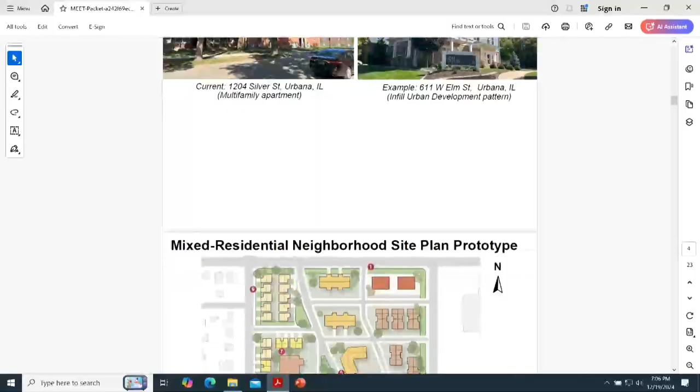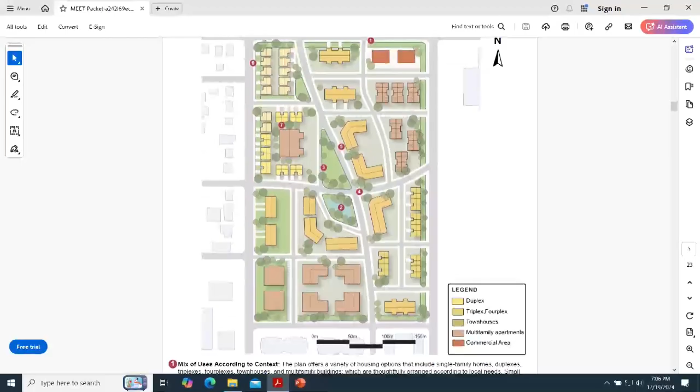And then they made final versions of these prototype plan views they had put together for a few of these different place types, based on some feedback we had given them. So I'd be happy to discuss any of these as we go through.

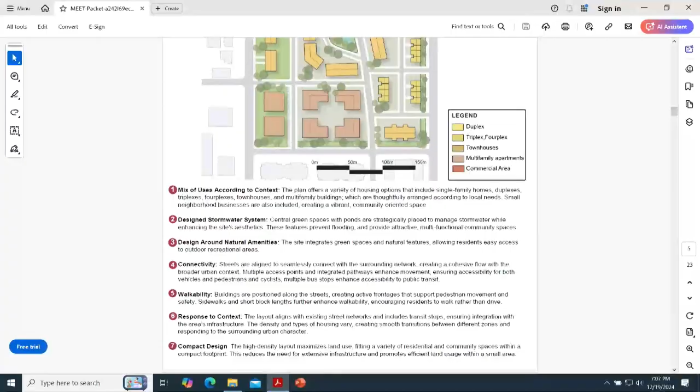We can do it, if you have specific comments about specific ones or things you want to talk about. I think as we go would be better.

I can start. I think we meant to do this, and it looks like it didn't get done, so at this point it will be on you to do. I've got the Illustrator files, so okay, I'm good to go. Well, this is not on that.

On the images for the different development types, I think we talked about how some of them are labeled, like on the mixed residential it says townhouses suburban pattern. I think that's good. I think some of these maybe need something a little bit more descriptive. So in some of these it's describing a development type, in others it's describing a type of change that's occurred. So I think we should be consistent across these. Townhouses suburban pattern is good.

Maybe as well as describing that it was this urban infill development, and then just something that's kind of consistent across the different development types. Like when you get to mixed use, there's the one that shows the hierarchy, that could be an example of business development in the mixed use, secondary core or something like that, because it just says secondary core.

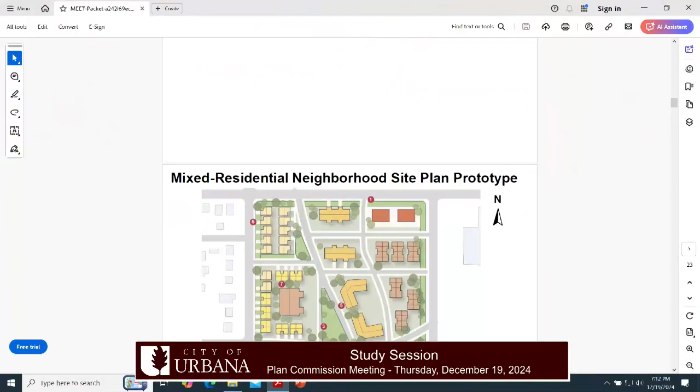Well, I think that's this, yeah, that's kind of this right here. Well, maybe these photos belong in your matrix or something if they're really the development types. The first four photos are development types, not place types. The site plan and the oblique are place type descriptions. Correct, yeah.

And that also means we need the rest of the development types in development types, as it's your matrix. If we're gonna do photos, we have to somehow coordinate the photos with that. Well, I'll let this go and then come back to other questions later. Mr. Rose, you had something?

Well, I concur with what I take as the gist here, namely that place types need a first presentation, and so the plan and the oblique would show the place, and it would be followed by development types. And it strikes me that these 4 photos of development types would benefit from having expanded captions to say the type of unit we're talking about.

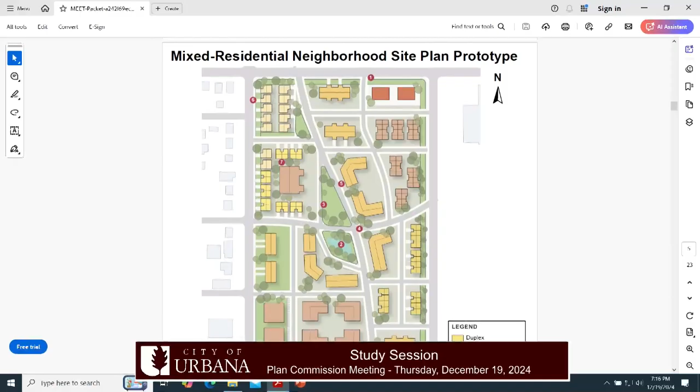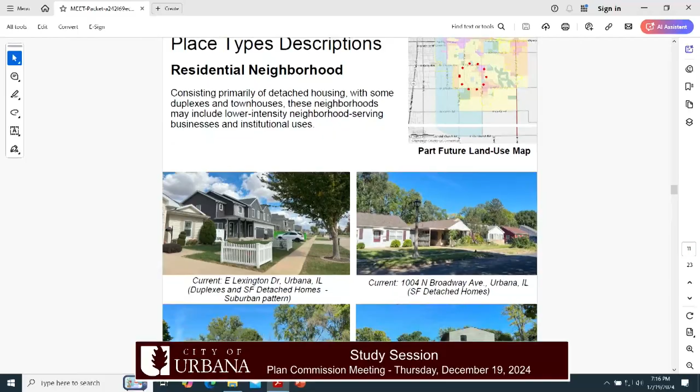I think the residential one is even more important to me because it's more about the different types of detached housing. So we wanted to show, not just what housing looks like in our older historic neighborhoods, but what housing looks like in other neighborhoods that have maybe different types of detached housing.

So I think it's useful to have that, and I think it would not be as clear to have something separate that you have to go back and forth with. A matrix could be part of this section, just a table someone could glance at, but I think it's useful to have this in each of the place types.

Mixed residential - we have a residential too, right, or do we? We don't have a residential at all? In what, mixed use? We do, it's toward the end of the packet. They're out of order. Well, I tricked you by putting them in a different order than last time I printed, to force us to actually read it.

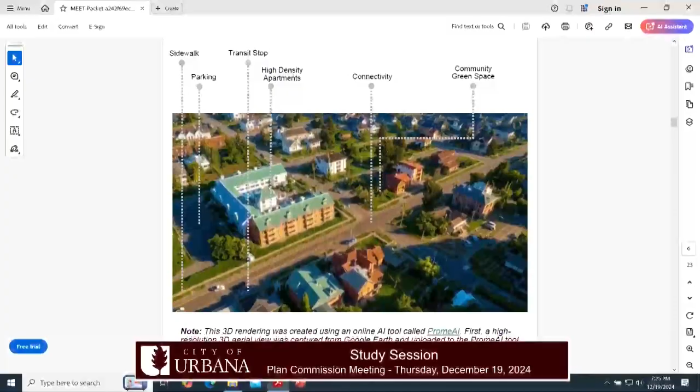Yeah, and I agree with you about focusing on Urbana as much as we can. And while we were talking a couple minutes ago, I was thinking the way I would like to do this is pull good images from Urbana where we can. And if there's something we just don't have a good local example of, then the fallback is to find a good example from somewhere else.

And I might add, if we are open to adding photographs, the photographs being of Urbana offer a link that I think is very valuable. But if we're talking about mixed use and connection, then a photograph of adjacent buildings seems to contain more than twice the information that a photo of a single building contains.

Yeah, well, we don't have an oblique for the mixed use. I think that would solve part of this problem. I mean, there are examples of a vertical mixing of uses, like Gregory Place, that we could include, in addition to downtown. But the thing that the site plan shows, and that we're trying to communicate, but don't have really good examples of, is more of a horizontal mixing of uses—a finer grain mixing of uses across a larger area.

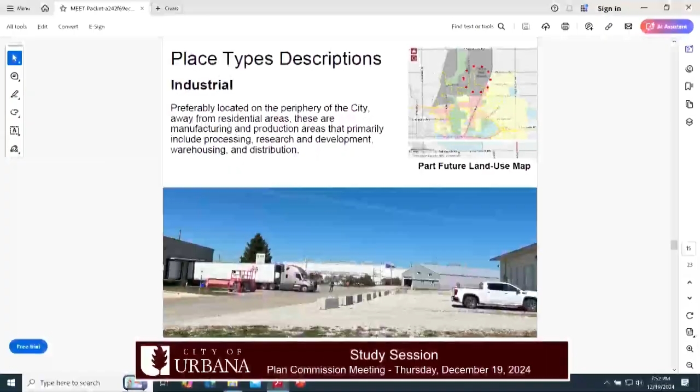The other thing is I think we ought to be intentional about industrial. We want industrial in a particular area because we want to take advantage of rail access, and we don't want people building houses there, taking away the opportunity to have a different kind of facility that actually might pay taxes, at least to the city, if not the school district, and be a good revenue-to-cost generator for the city.

I don't know that we need to keep the industrial zone along the south side of University, but we should be protecting the industrial on the north side of University intentionally, which I assume we are.

And the reason to be very explicit about rail is because we are going to give up rail in a particular area, and we ought to be protecting rail in the other area, and we ought to say that explicitly in what we're up to.

I thought we had talked about making a distinction between certain types of industrial - not just heavy industrial, but industrial that is a disamenity, or things that we don't want other things next to, versus less intense types of things that some might call industrial that are actually a good fit.

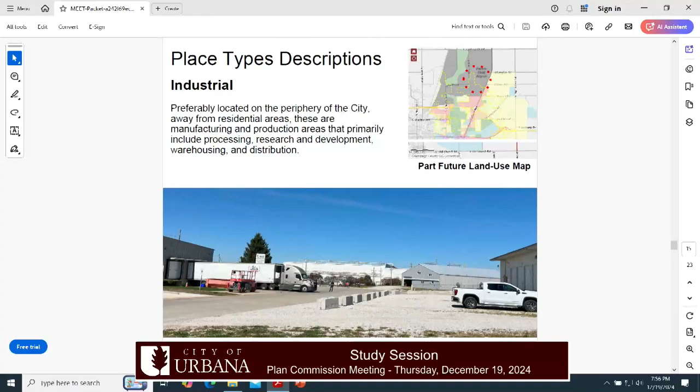Definitions - the problem is commercial means three things. To an architect, it means a building standard. To a citizen, it means a place where I go shopping. To a zoning ordinance, it means a whole set of other things, and we want to change what we think that is a little bit for some commercial zones. So we've got to allow for all this in our discussion, our description of what commercial is. I struggle with coming up with a better word though, because it is all about commerce, right?

We've got to say that in the plan, in the descriptions, including our development types and so on, we're going to use that word. We just have to elaborate in the various instances what it means. I think it's fine. Like if you look at the mixed use description, it doesn't talk about commercial, it describes things like businesses, offices, whatever. So if we want to add more nuanced descriptions, we can do that without defaulting to commercial. And within the commercial place type, we can make that list more expansive to capture some of these light industrial type activities that we think would be appropriate in those areas.

One of the terms we used before, when you talked about the derivative of commercial being commerce, we talked about commerce centers at one point, and I don't know if that's a better activity descriptor. Activity centers, we said, didn't we? Yeah, we did, and that's on the development opportunities map, as we have some of these areas called out as activity centers. Anyway, I think that's the only other comment I had on the place types or the development types.

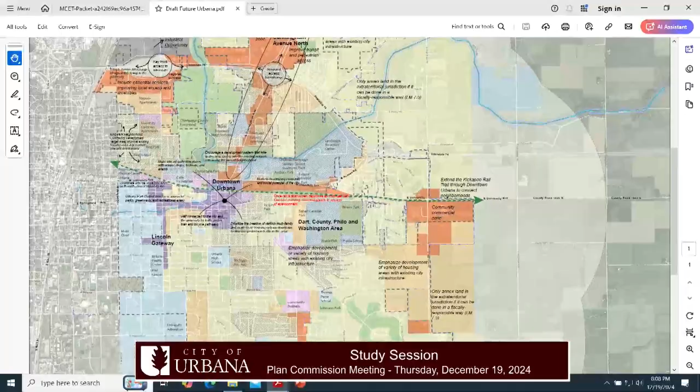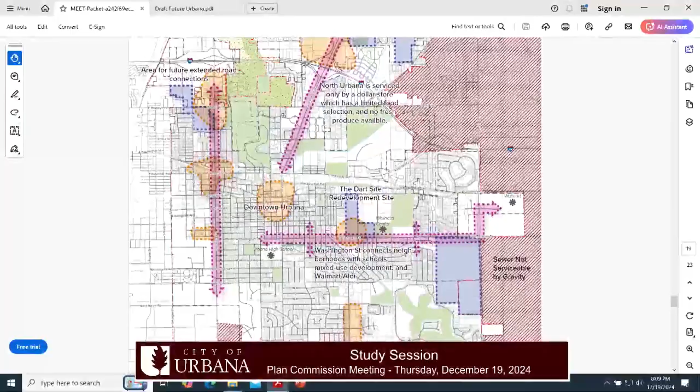The Washington and Philo, missing on this one? No, it's here as that sort of secondary core. It's this piece here. Oh, okay, I was misreading. Well, but it's on this map, it shows it as sort of the southwestern portion of this activity center, but then we're kind of going up to include sort of this Dart site, for whatever might happen there.

Kevin, on that other map, is it the rose color that's the secondary core, or is it this hatching? Yeah, it's this weird color that threw me off. All right, thank you.

Yeah, the hatching is the community development target areas. Shifting color scheme that threw me off, that the secondary cores are lavender and not. Yeah, and it doesn't help that I was zoomed out to here. It's kind of hard to see.

But a couple other things, I think on this map, I had only noted one other change that we had talked about, and that was, and this can be wordsmithed, but I know Lou last time said, be explicit that when the rail gets abandoned, what do we want to do. So I said, repurpose that as a multi-use path, and since we've got some sort of industrial areas there already, I said, consider rezoning those in advance. I might, if that's all right. I don't know if that's too straightforward.

So, one of my reactions in having spent some time with this map is it needs a lot of editing. There's too much on it and not enough—there's not enough of what you just added, which is actually specific, useful information that tells us something significant in the plan. There's a lot of other stuff that's just labels getting in the way, and so on. I started to edit it, but then I decided it makes much more sense to actually edit the document than for me to run around with comments trying to fix it.

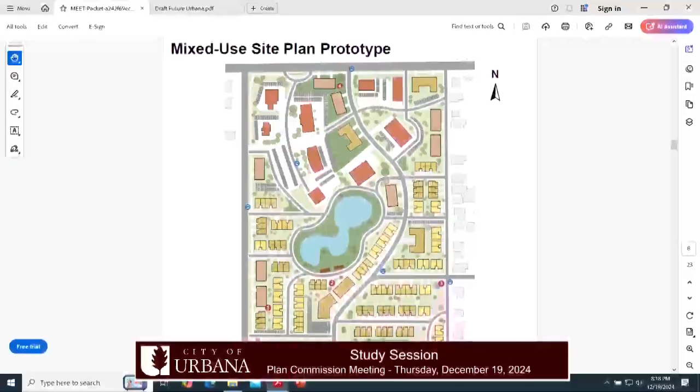So there are some residential and mixed in. That's a graphic flaw, not your flaw. In other words, there's not a legend on here, right? On this piece, so it also means that we need to be able to distinguish those buildings.

So another example is to put lines to imply gable roofs, which is one way to show that's a residential building, not a flat-roofed commercial building. There are graphic tricks for this stuff. We just don't have quite the staff to be drawing lines in the middle of buildings.

But I still have the problem, this is the Philo, but it's used for mixed-use site plan, but it is not in our map listed as mixed use. Well, it's not supposed to be identified, we're just saying it's conceptual. But we're not, again, like this type of mixed use does not match with any of the mixed use I can imagine in Urbana that is being picked out.

Can you imagine any of those sites being developed to something like this? Of which sites? Any the ones that are identified? Mixed use core and mixed use secondary. I mean, I could. So the mixed use sort of that's at Philo in Florida, there's a lot of empty parking lots there. I could see some apartment buildings filling those in.

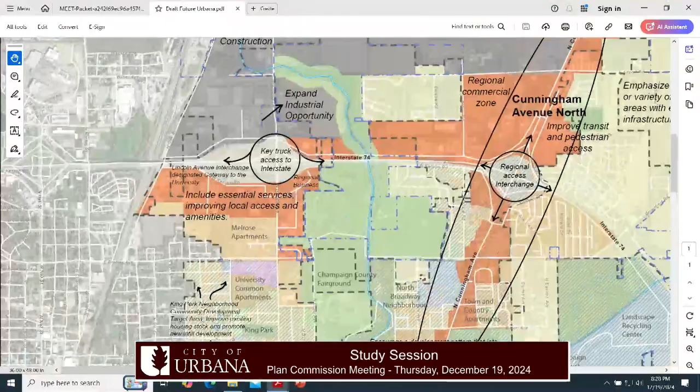Briefly - and this is not the place to do the kind of substantive editing that has to be done. On this map - let me pull up this one. It's not clear to me that the stuff to the right of the creek should actually be industrial.

I don't think we've made that expectation that I'm aware of. Maybe we have, but it's a surprise to me because it's not clear why we would do that. So I need to go back - if anybody's watching the tape later, the hatched areas on this map actually show changes between the existing future land use map and this map. But they don't show all of them - this green area here should be shown as a change.

I'm not sure - I thought this was industrial because the current future land use showed it as industrial. It may actually have everything north of Olympian as sort of future planning area. I'm not sure, but Lou, you brought your comp plan. Is that light industrial on the right? Yeah. Okay.

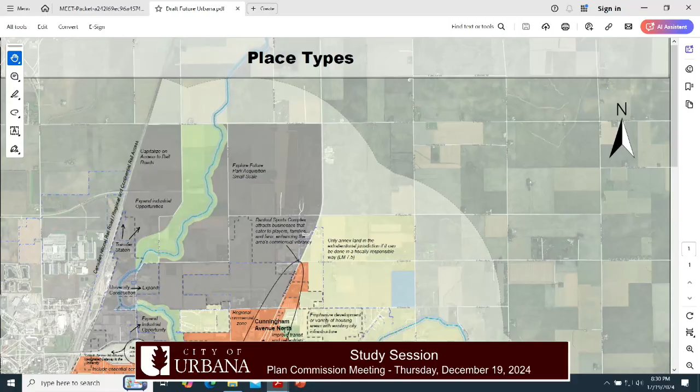But it's not that area - did not go all the way. So this is south of Ford Harris, and west of the existing land use - sorry, I'm looking at the wrong map. No, go the other way. Yeah, it's not shown.

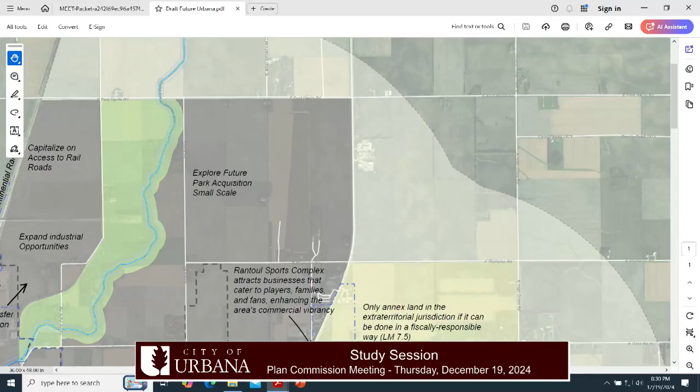Hard to tell - I think it has the block color of light industrial. Oh yeah, it probably does. Light industrial is really hard to see on the existing future land use map because it's laid over the aerial.

Been left out in the sun, maybe. It's been used a lot. In any case, I question whether we want a square mile at that location identified as industrial. I don't know, but it's extraterritorial anyway. But it's still a kind of massive allocation of land to industrial.

I'm gonna pop over to this other one. I want to see this. Okay, I just wanted to make sure that this area is all serviceable by gravity sanitary sewer, so it's a development opportunity.

So what I said I was gonna try to focus on is substantive stuff, questions of what is it we actually wanna do. And that one, I think we need to look into. Oh come on, jeez. The other thing is the green space.

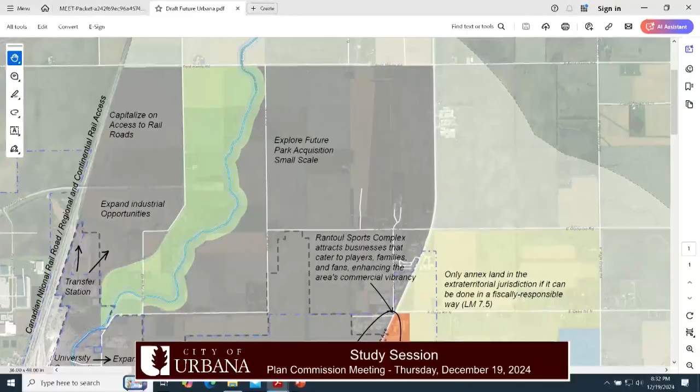Which is slightly different from the previous plan. Basically somebody has put a green buffer on the east side of the creek, which isn't shown in the other plan. Well, and also on the west side, was it in the previous plan as rural residential, I think? And the green here is green space, that could be. But in any case, we need to have a reason stated why that is shown the way it's shown.

And I'm guessing it in part has to do with protecting a stream corridor from an environmental point of view. But it's not intended as green space in a zoning sense, I don't think. So this is an example where we need to annotate it with an intention, something more like your statement up for the Kickapoo Rail Trail. I don't know what it is. Again, it's not that there's an answer, it's that we need to figure out what it is we want to say.

Can we go back to the industrial question? So earlier Lou made a comment that when we think about areas that we want to show as industrial, we should do it based on the characteristics of the place, as in their access to rail or highway or something like that. So can we sort of think through the logic of the areas that we've identified as industrial?

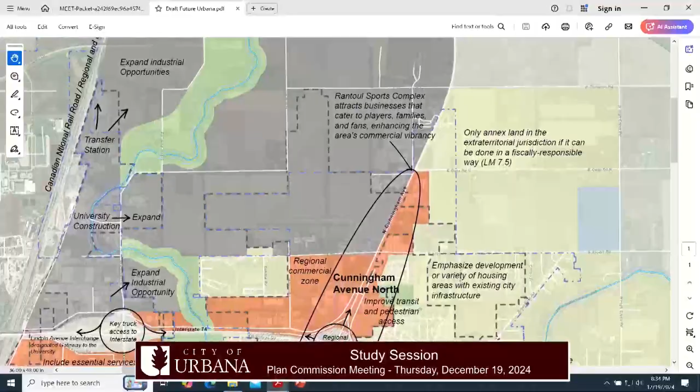Does that hold up? For this area, I don't know that it makes as much sense as for this area that's next to the railroad, closer to the Lincoln Avenue 74 interchange. It's not like this area is far from 74 here. So you could have, that has decent truck freight access. I don't know about all the way back here. It's not too far, but maybe, yeah.

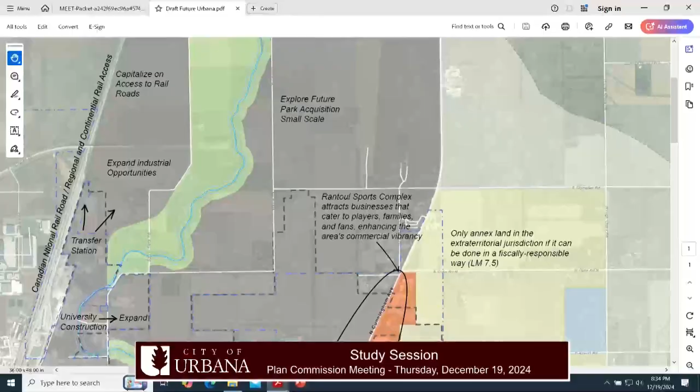But there are road improvement issues and a whole bunch of other things. If that's really going to be industrial, we need to think about it. It's also a corridor that's commercial at the moment, I think. What is out there that's not agricultural land is commercial.

Talking about on Cunningham or on North Olympian? Cunningham? Yeah, on 45 North. Route 45. Okay, well, I've flagged those. Sorry, I'm in Ohio. All right.

So let's see, what else have I got on this one? There's some graphic stuff. Some of the annotations are in the wrong place. We don't need to deal with that.

Lou, we're going to have to get you your own graphic software. I no longer have the graphic software on my computers because I'm not at the university.

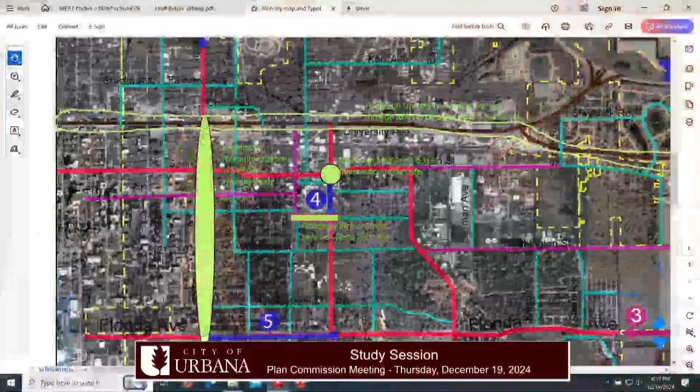So, first, over here in the green that's probably impossible to read, it says to implement the recommendations of the Lincoln Avenue study, whatever the official name of that is, that we're just wrapping up here shortly.

Another is I kind of circled or drew a line around all of University Avenue from the western edge of the city to the eastern edge out by Walmart. This isn't the greatest statement, but I just said redesign University Avenue corridor through town to be safer, and in parentheses I put IDOT controlled. We can tweak that.

Another thing, for this map, if it gets too busy, using numbers over to a legend may still be good. That's probably what I'll do. I just wanted to plop them on the map for discussion purposes.

Another thought on the graphics, where you've done Lincoln, I think we ought to do the symbols for projects in the same color as the street type, or maybe the numbers for the projects. Anyway, just an idea. But I like that you've come up with some symbology to try to get the graphics for projects in there.

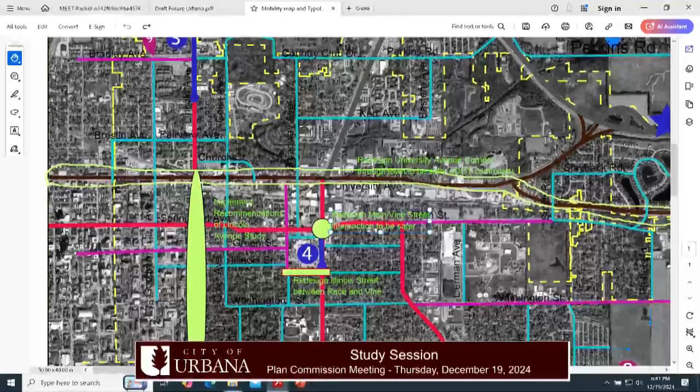Now, these are additions to the project list. So these are ones we've got as projects and we've got proposals, or recommendations. A couple of these are things we talked about at previous study sessions. Some of them, like the Lincoln Avenue study, are going on right now. So I think we should distinguish between projects that are real, either going on or already approved, versus listed recommendations.

And the recommendations, many of those came from public input too. When you talk about safety, almost everybody brought up that intersection. But they go in the plan as recommendations because institutionally, we decide that we want to put them there, not just because somebody brought them up.

Okay, and then the last one on here, I said to redesign Illinois Street between Race and Vine, because that's already something that we're planning to do, but just to call that out on here.

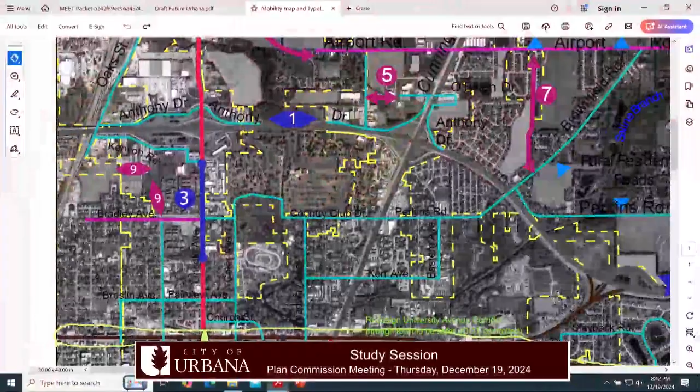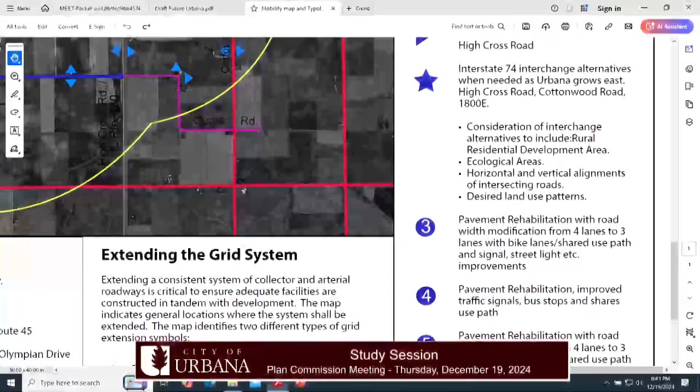The project that's happening on North Lincoln, is that on here? I did not put that on there, but yeah, wait, is that what number 3 might be? That's what I think, and they had put number 4 on as well, which was the Vine Street project. So, yeah, that number 3 is the North Lincoln one, the students had put that on already.

Might be helpful to reference the street on those descriptions too, so you know that it is Lincoln. So those are the ones, because you had said you had some list or idea of these. Is that all the ones that you're aware of? Yes, but I'll talk to our public works folks and make sure I'm not missing anything.

Anyone else? Does the Commission know of any of the projects we should talk about or problem areas, mobility-wise?

And I would reverse some of the color coding, but we can talk about that at a different level.

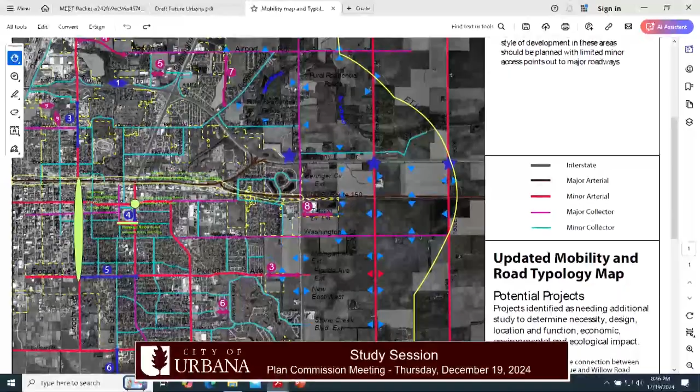That's why we're here for discussion. I'm going to disagree halfway. I think this number of distinctions is about right, and there's a reason to keep connected to this other one. But I think we've attempted, in what the students did, to develop cross-section versions so we can describe these as something more than speed. Maybe we create labels, or a parallel set of labels, or an annotation to make them say more than just speed.

But to me, partly because I live on them, the distinction between an access street, a minor collector, a major collector, and an arterial is more than just speed. It's the street cross-section. If we're going to talk about activity nodes, it makes sense at intersections, especially of major arterials and major collectors, or major collectors and minor collectors. So there's a logic to this that I think is useful.

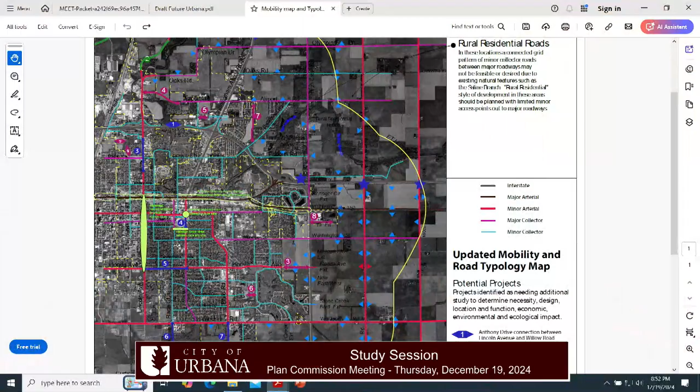I understand, but we also probably don't want to change the possibility of different access, street connection access, driveways and streets. We want the ability to have that distinction, it seems to me. So again, we have to enhance these descriptions.

So what are the pedestrian crossing mechanisms on whatever Windsor is, a minor arterial or a major arterial?

And the crossing at the end of Vine Street into Meadowbrook is an example, where it's specifically created with a center island and a sideways tilted center island, so people have to stop and turn and look at the traffic.

Yeah, and also what do the pedestrian and bicycle facilities look like on arterials? Obviously they don't describe anything related to those other users, in terms of how they're thinking of it, but I think this is what we can do, make this set of stuff more expansive.

So should we move along to that? Well, we haven't looked at the development opportunities map yet, which I think is in the same folder before you jump to other folders. Yeah, or other file.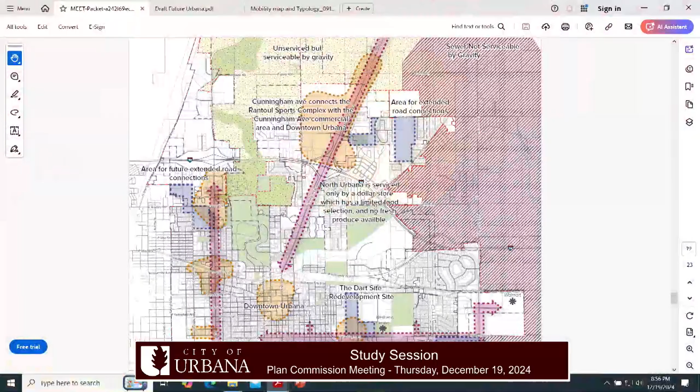But that's outside the city boundary, inside the ETJ, right? Is that inside the city boundary? Yeah, the stuff here up to about here is inside the city boundary. Okay, the boundary's on the map, so you can see where it is.

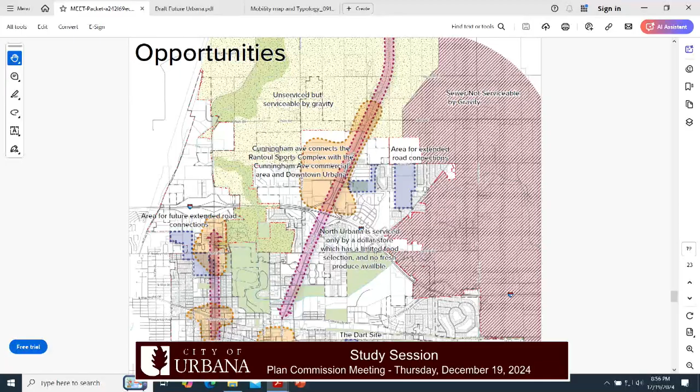Okay, I was just thinking, so we're only doing these blue development opportunities for things that are inside the city boundaries. Yeah, I mean, or if there was something adjacent to the city that we could annex in.

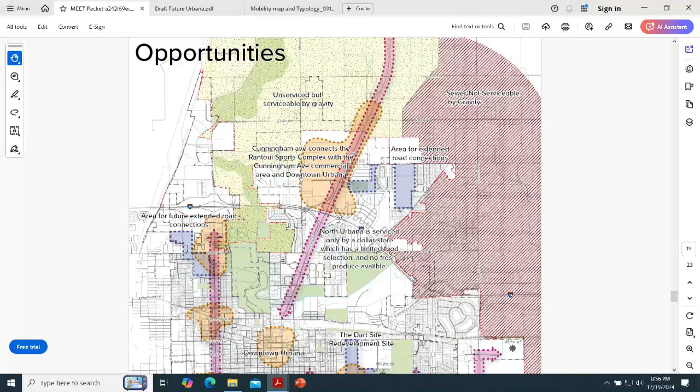I don't think the two up those two, yeah, this one might actually be outside. I think it is, yeah, I think that is outside. And the other one next to it may be outside too, yeah, that one is too. But anyway, I agree with you, I think they should still be identified as development opportunities.

We already talked about the sewer, checking the sewers with Brad.

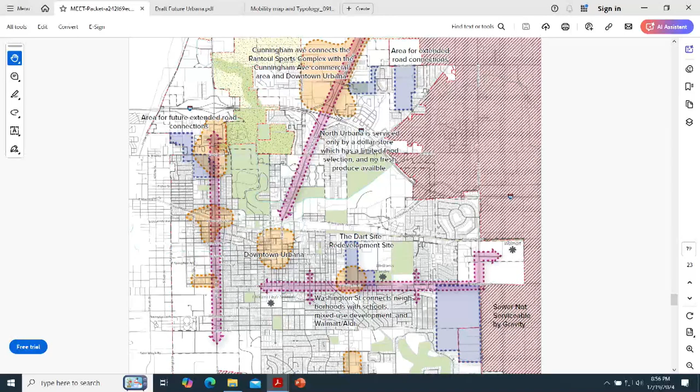And the annotations, it's too hard to pull up my own copy. The annotations for area for extended road construction connections need to be done in a different way, because there's no indication of what it means.

There's one there, and there's one over by, north of the tiny homes site. They're on the mobility map in a meaningful way, so maybe they don't even have to be here because they're on the mobility map, but the way they're done here doesn't make any sense.

Yeah, they're road connections internal to those development opportunities. So it's really, I think it's misleading the way it's displayed currently. I think we don't need to put it here because it's on the mobility map. We need to have it from the official map protection point of view, but the mobility map can serve that.

Or the connections map, we're calling it now, right? The connectivity map. I think it's still labeled as mobility map, but I think we ought to call it the connectivity map, because that matches back to our ideas. That matches what I called it. I was editing that section of the comp plan online earlier, and that's what I chose to call it.

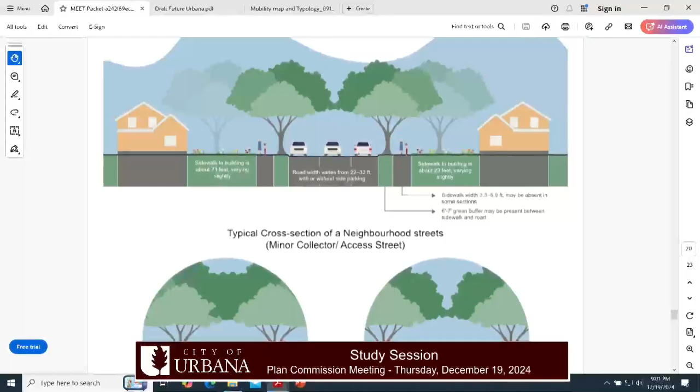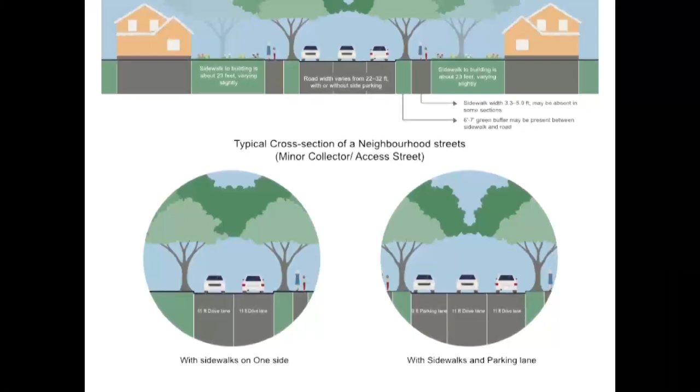Sure, it's kind of what Lou has already said. We wanted to give a fuller description of these different street types that we have: arterials, collectors, and residential access streets, I think, is how we refer to them. So giving a sense of what the cross-section of those streets would be and how they relate to the surrounding land uses and how they incorporate a variety of modes of users for those.

And then knowing that for each of these different types, the conventional classification, we have a variety of different examples of how these actually look in Urbana, so trying to provide some examples of what minor collectors and access streets look like within the city. So these are all sort of existing conditions.

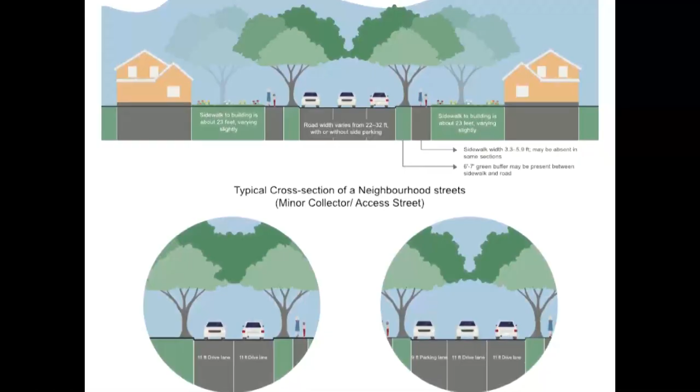Because one of the issues I had was that the lane widths are highway level, which is probably what we have in a lot of places, but 11-foot wide lanes is pretty wide for a residential street. Yeah, I don't think that they went to the manual of practice or anything and looked up, do the streets say they're 11 feet? They'd have little dimensions on them, but that might have come as a default in the program that they were using.

That's fine, yeah, but that's an example of what we want to change, because these are intended to be indications of what these should be, not that. And we might, maybe this isn't the place to have that. I mean, we have that level of detail in the land development code, the manual of practice, and we want to make sure that we're not contradicting that. So maybe these are not dimensioned per se, they just have drive lanes, parking lanes.

Yeah, but we might want to give some direction here, because I'm not sure, I don't go into the manual of practice to look up standards very often. But it's very likely that our manuals are, you know, still based on things that are 50 years old.

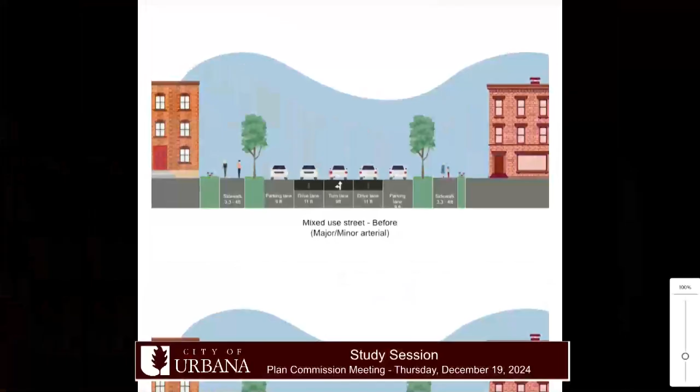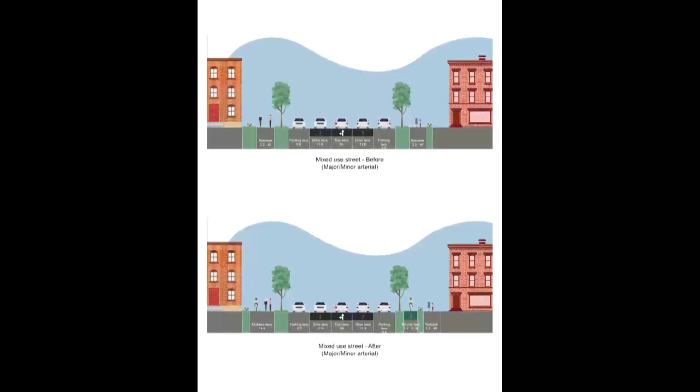Okay, so then on the next page is actually a before and after. Which one are we on? Okay, which they look pretty similar, but that's just putting a nice protected bike lane in, which is probably a good treatment for an arterial with fast moving traffic.

And I think with the after, we tried to get them to do two different things on each side of the street so it could show different ways you could accomplish this. So one side has a bike lane that is separated from the sidewalk, and the other side has a multi-use path. Because I think we have examples of both, probably on major and minor arterials.

And which graphic are we on? Because I've got trouble keeping track. This one is the mixed use, second one. So one of the things I said is the buildings on the right are set back, and they shouldn't be if they're up against, like the lower right shouldn't be if it's up against a sidewalk. And on the upper one, it's not clear. I mean, it should be next to the grass. It shouldn't have a grass strip and then another sidewalk.

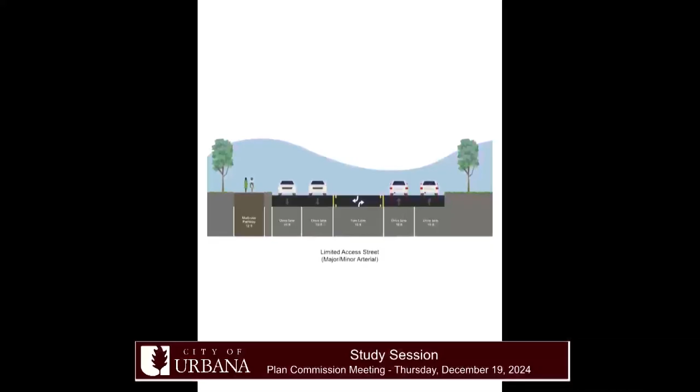Right, and then I think that might be the final one. Yeah, the final one is this limited access street, so that would be your major or minor arterials. The turn lane is very wide, too wide, even forgetting about specific turn lane widths. I noticed they've got it specified as a width, which probably exists, but I don't think a turn lane needs to be that wide.

And one of the points of doing this cross-section, the trees are too small. They don't look right, and we want big trees. But we specifically put a multi-use pathway on one side as a notion that we should do that if we're gonna have a limited access, major or minor arterial. So this is Windsor Road, or Curtis Road, or South Philo Road, or whatever.

So the fact that we don't always do this, but actually we're doing better, right? We've got it on High Cross now, at least partway. Got it on Windsor. So that's the main point of this, is to make that explicit.

I don't know if you have access to these files for changes to them, but I find it a little bit confusing that from grade down, it looks like everything's continuous concrete. I could live with that, except that we do distinguish a green and a dark above, and it's hard, as if we're indicating material and thickness of the material. So it's confusing in that way.